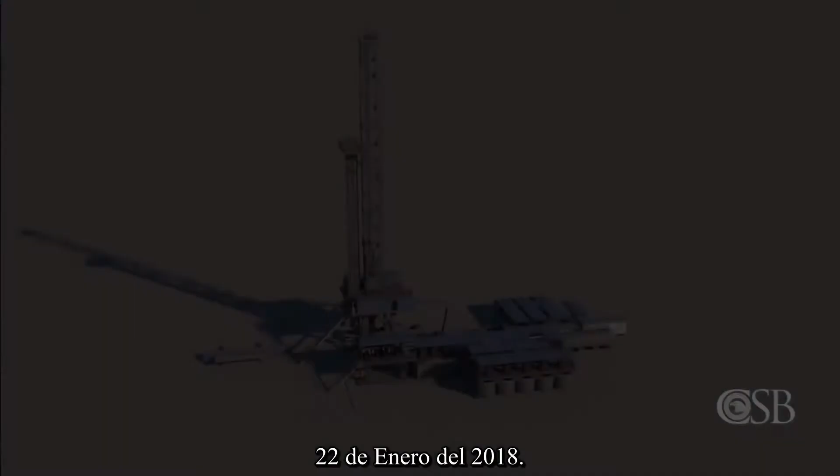January 22, 2018, the Pryor Trust gas well in Pittsburg County, Oklahoma. The well was operated by Red Mountain Operating, LLC, which contracted the Patterson-UTI Drilling Company to drill the well. In order to change a drill bit, crew members removed the drill pipe from the well. Approximately 3.5 hours later, a blowout and rig fire occurred, killing 5 workers.

Industry best practices recommend having 2 protective barriers in place at all times during drilling operations. But our investigation into the incident at the Pryor Trust well found that both of those barriers failed. The safety management system utilized at the well was simply not effective, and the result was a catastrophic blowout and fire.

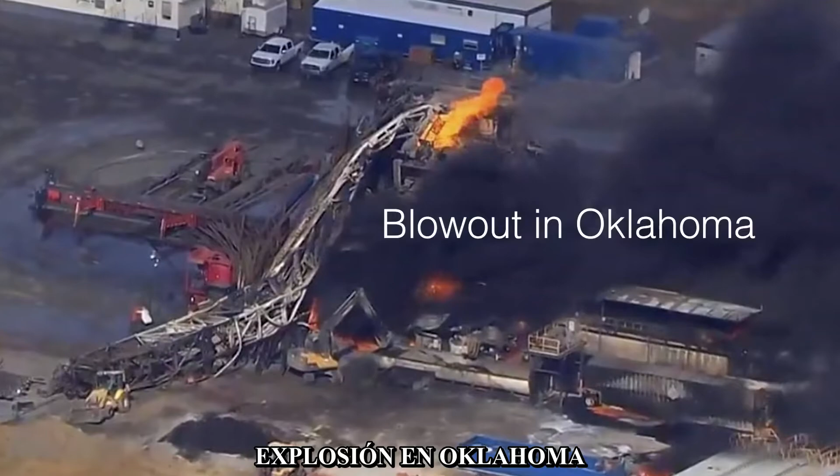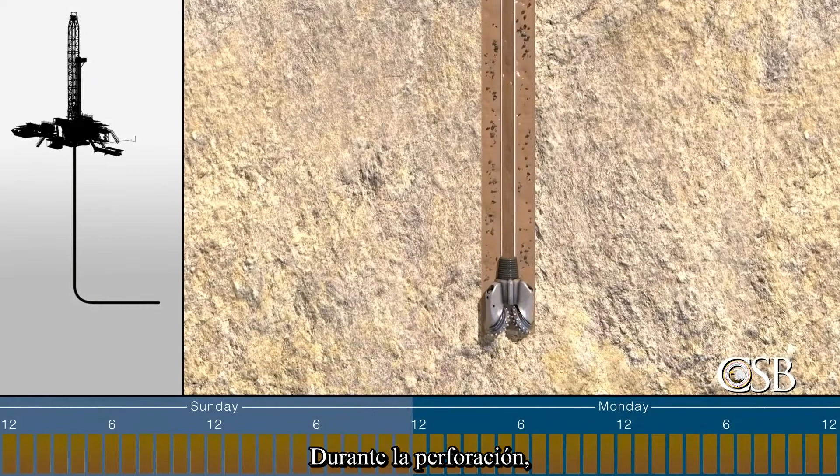The Pryor Trust gas well was comprised of vertical and horizontal sections being drilled to reach underground natural gas in the Woodford geological formation. During drilling, a diesel oil-based liquid called mud is pumped down through the drill pipe and back up through the area of the well outside of the drill pipe, called the annulus.

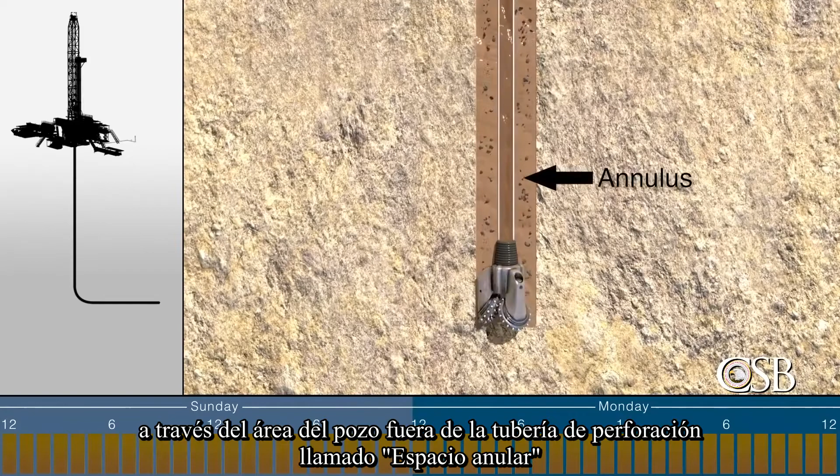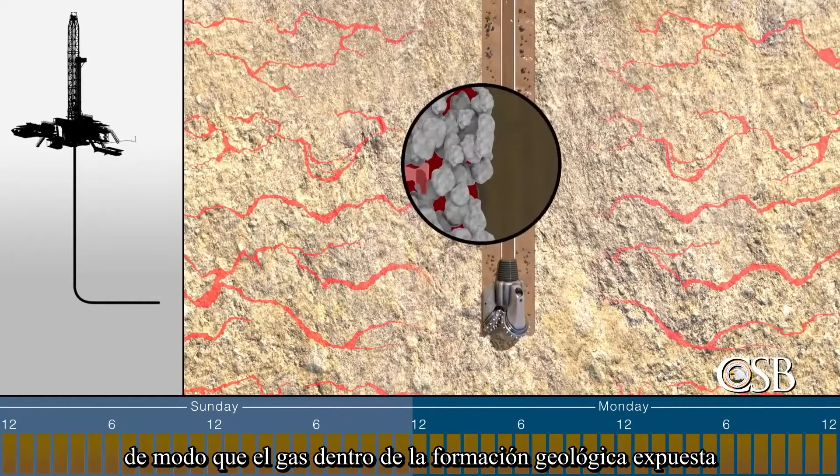When mud returns to the surface, it includes rock cuttings from the bottom of the well. Mud, however, has another important function. It is designed to add pressure to the well so that gas within the exposed geological formation is unable to enter the well during drilling. If that happens, and the gas is not detected, it can lead to a dangerous blowout.

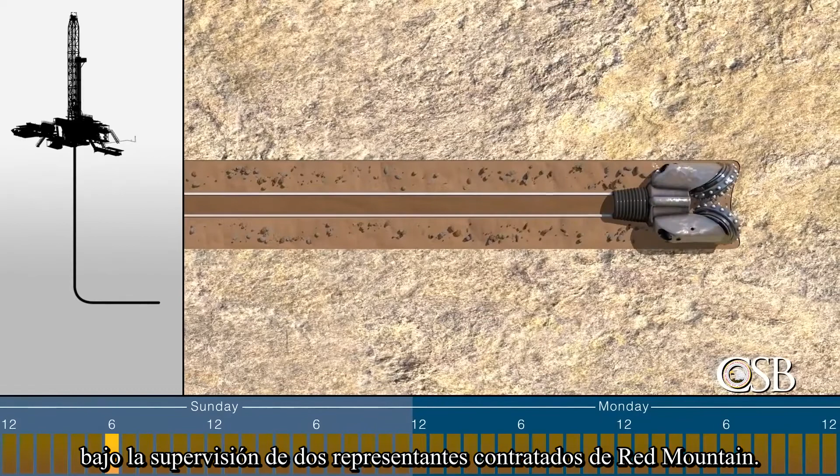On January 21, 2018, Patterson crew members had been drilling the well for 10 days under the supervision of 2 contracted representatives from Red Mountain. They were drilling the horizontal section of the well.

That morning, a crew member called a mud logger studied the rocks returning to the surface and found they were different than expected. He believed the drill pipe had inadvertently entered a different geological formation where Red Mountain did not intend to drill. Shortly after, gas started to escape from mud returning to the surface.

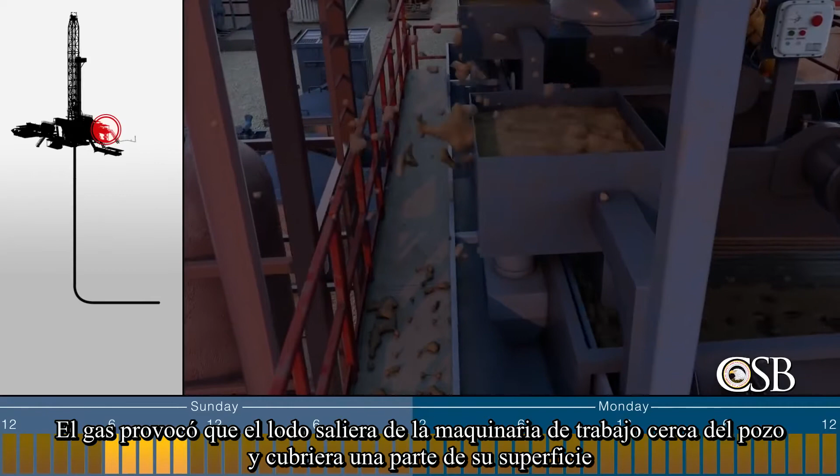The gas caused mud to spit out of equipment near the well and cover a portion of the rig. Around 11 a.m., the drilling crew adjusted piping so that mud returning from the well was routed to a piece of equipment called a mud gas separator that removed the gas from the mud. The separated gas was then routed to a flare to safely burn it.

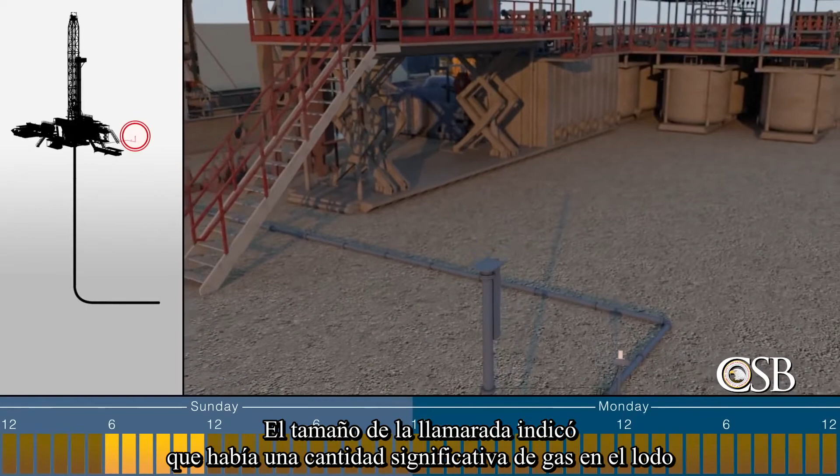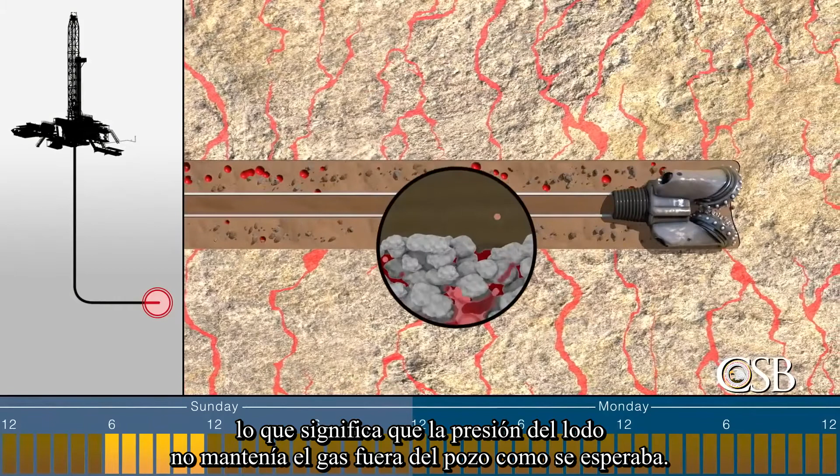The size of the flare indicated that there was a significant amount of gas in the mud and that the well had likely become underbalanced, meaning that pressure from the mud was not keeping gas out of the well as intended. The crew continued drilling underbalanced until 3:30 p.m., when they stopped because the drill bit had become worn and needed to be replaced.

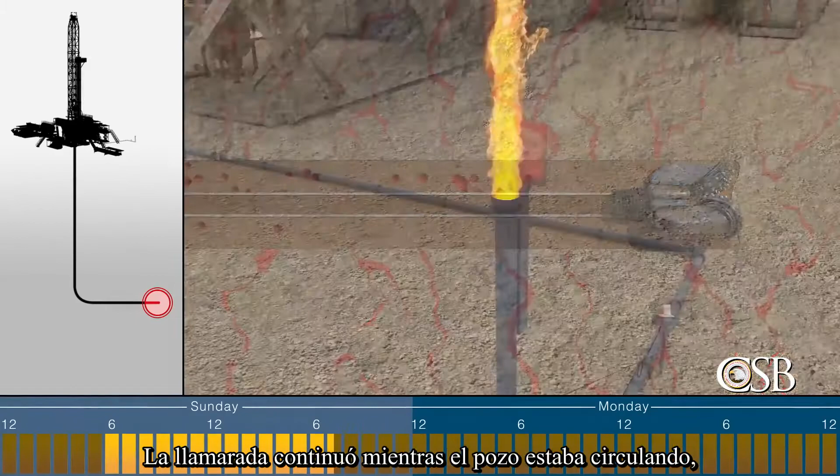The crew first circulated the well for 3 hours by pumping mud down the drill pipe and up the annulus. The flare continued while the well was circulating, an indication that the well remained underbalanced.

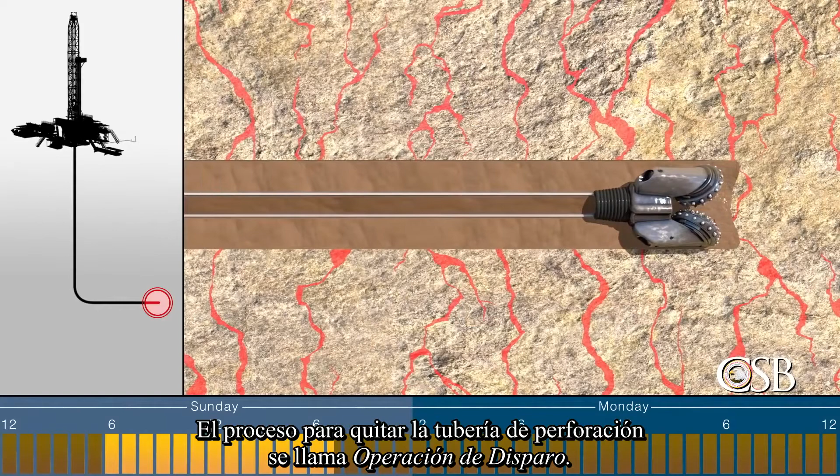While circulating, the Red Mountain representatives discussed how to remove the drill pipe from the well in order to replace the drill bit. The process to remove a drill pipe is called tripping. During any tripping operation, mud is pumped into the well to replace the volume of drill pipe being removed, which prevents gas from flowing into the well.

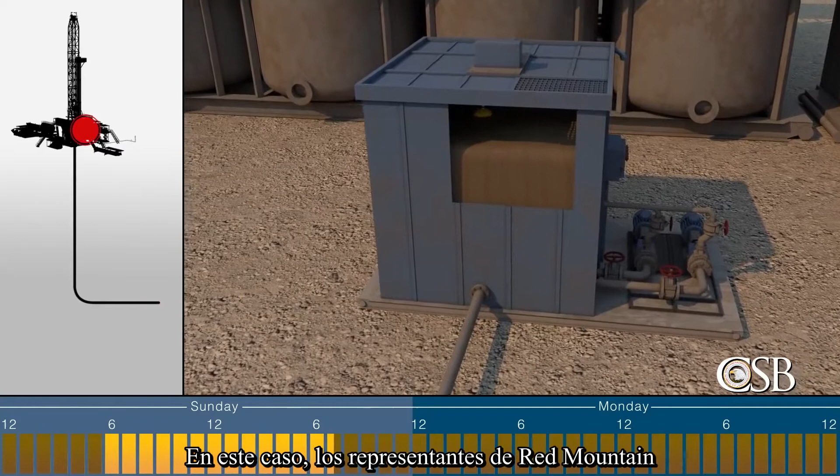In this case, the Red Mountain representatives decided to use a tripping method called calculated fill, which involved periodically pumping a calculated amount of mud into the well as the drill pipe was removed. They believed this method would keep the well contained if gas entered during the operation. But it was not a standard tripping method during normal drilling, so no one on the Patterson crew had performed it before, and they had no written procedure.

The crew started removing the drill pipe at 6:47 p.m. The CSB found that while tripping the drill pipe from the horizontal section of the well, not enough mud was pumped and gas entered the well.

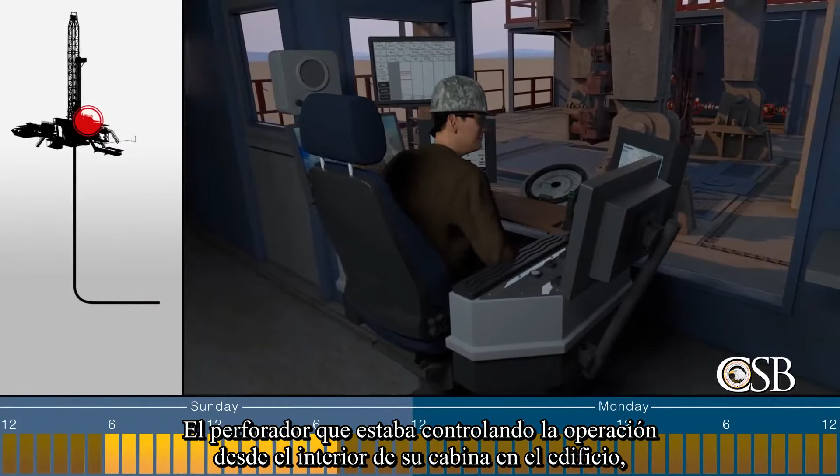The driller, who was controlling the operation from inside a building on the rig called the driller's cabin, did not see the discrepancy. That is because he had not been sufficiently trained on a new electronic version of a trip sheet, which is a form used to monitor and calculate whether a well is taking the proper amount of mud during tripping.

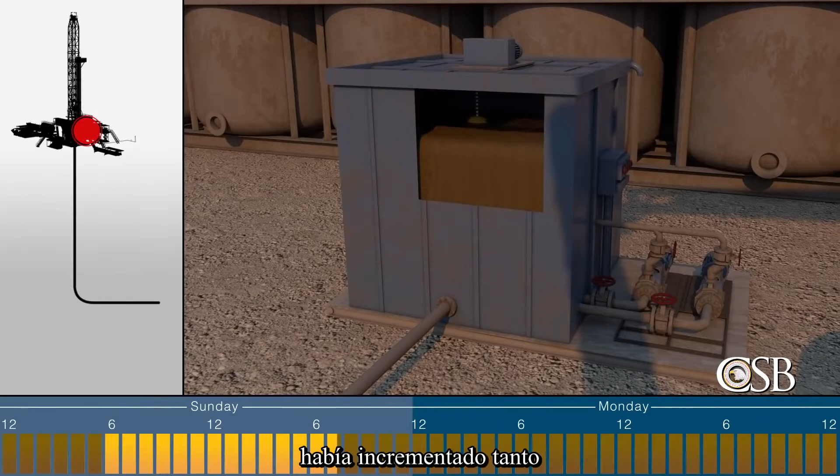As a result, he was unable to see that a significant amount of gas continued to enter or expand within the well, causing pressure in the well to increase and mud to backflow into a tank at the surface called the trip tank. In fact, pressure at the surface had increased so much that the centrifugal pump the crew was using was no longer able to pump mud against the pressure of the well.

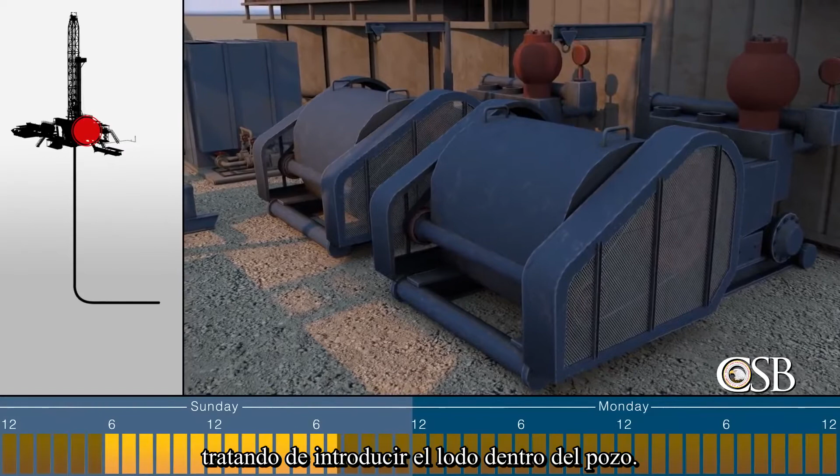Red Mountain's representatives decided to switch to higher pressure pumps, called mud pumps, to try to force mud into the well. They believed that the pressure applied by the new pumps would push any gas out of the well.

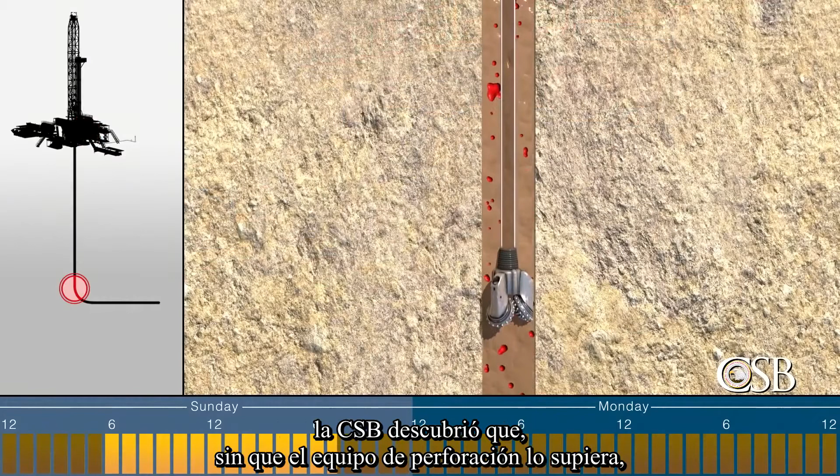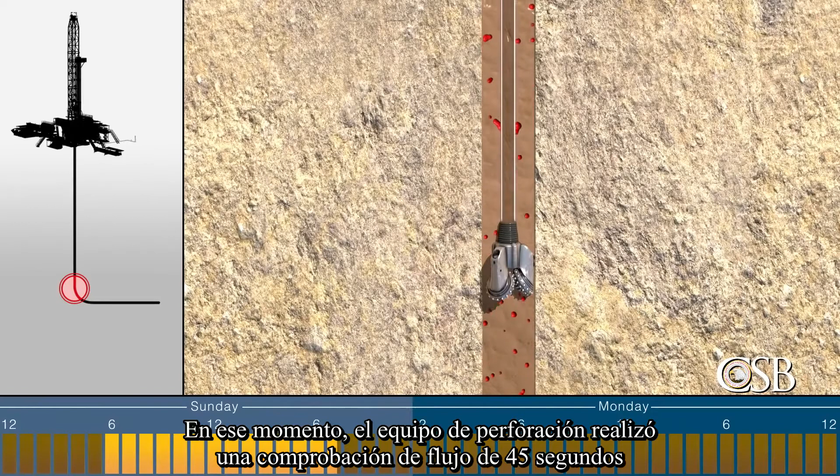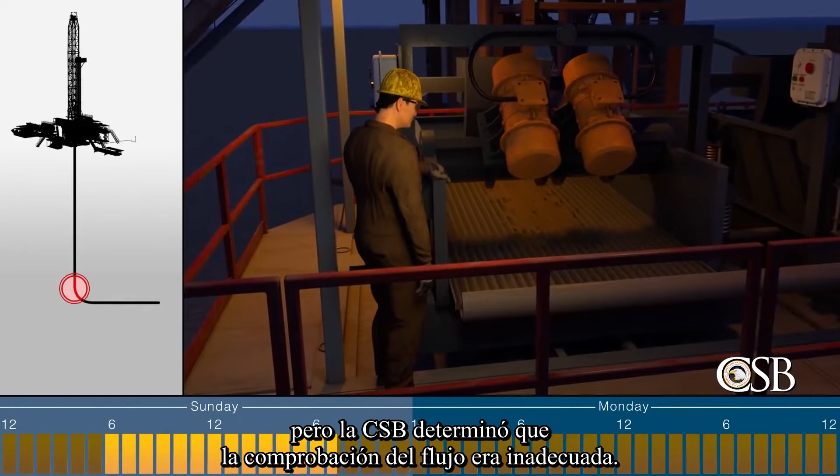But by the time the drill bit reached the top of the curve in the well, the CSB found that, unknown to drilling crew members, 20 barrels of gas had entered or expanded within the well. At that time, the drilling crew performed a 45-second flow check to see if gas was flowing in the well. The crew did not observe any flow of gas and believed the well to be stable, but the CSB determined that the flow check was inadequate.

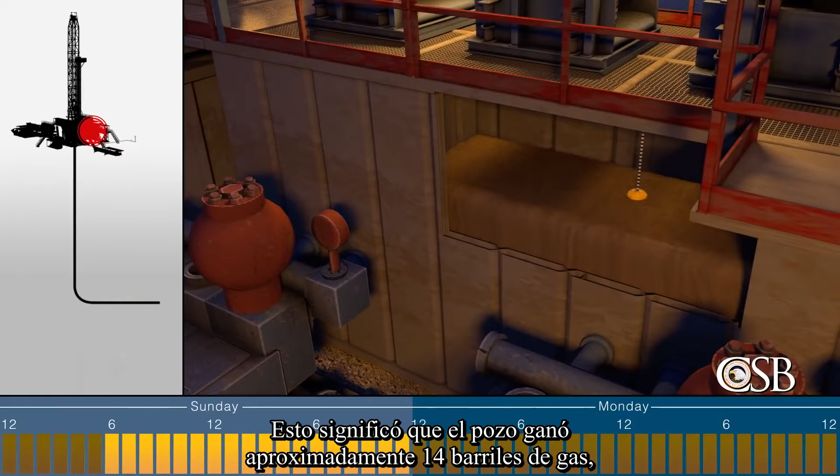At 11 p.m., the drilling crew again circulated the well. While circulating, the rig's mud pits, which are tanks used to hold mud at the surface and are equipped with level sensors, gained 14 barrels of mud when they should have remained stable. This meant that the well gained approximately 14 barrels of gas, which caused the mud to escape at the surface.

But the night shift driller had turned off the alarm system before the tripping operation, and no alarm sounded, so the large gain went unnoticed.

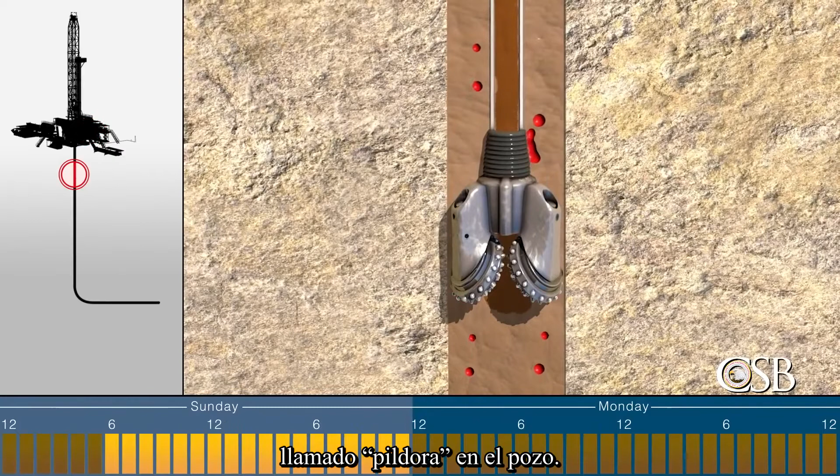Red Mountain's representatives then decided to pump a weighted volume of mud, called a pill, into the well, meant to generate enough pressure to prevent gas from entering the well.

But a Patterson drilling crew member misheard Red Mountain's instructions over the radio, and they accidentally added lost circulation material to the pill. This material is designed to clog breaches in the well and is not intended to be in weighted pills. Although the mistake was discovered, the pill containing the lost circulation material was pumped down to the bottom of the drill pipe, clogging it.

By 1:12 a.m. on January 22nd, the crew started to remove the drill pipe from the vertical section of the well, this time using the typical industry tripping method called continuous fill, where mud is pumped continuously into the well as the drill pipe is removed.

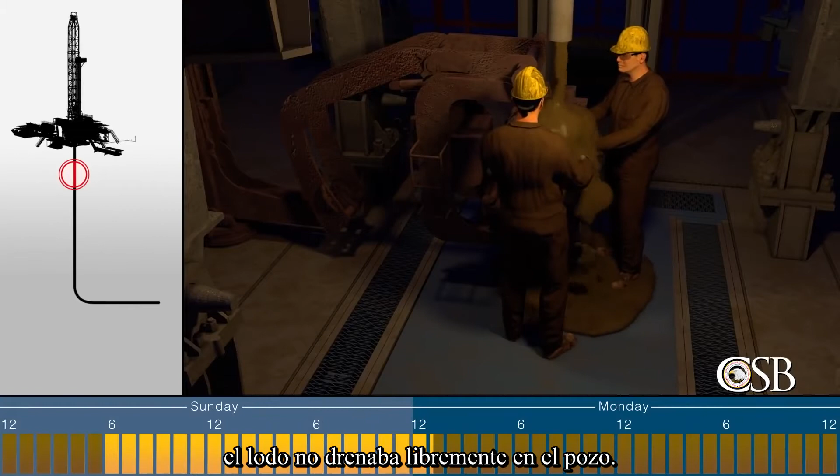But because the drill pipe was clogged, the mud was not freely draining into the well. The crew attempted to pump a weighted slug of mud into the drill pipe to push the clogged mud out, but this was not successful.

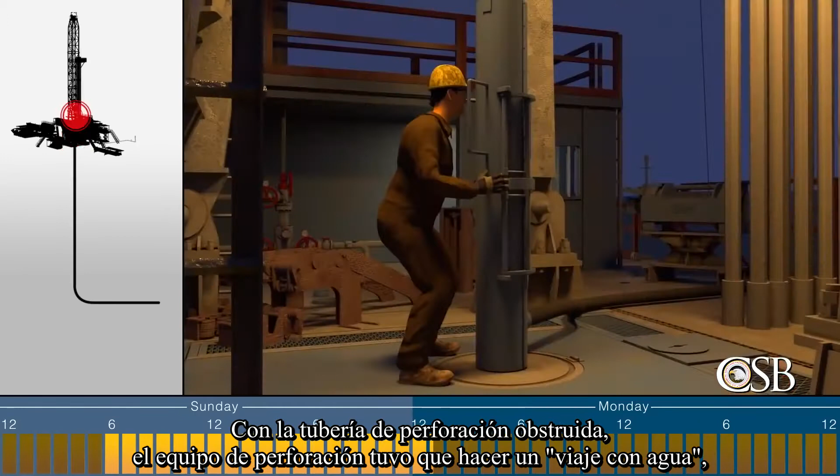With the drill pipe plugged, the drilling crew had to trip wet, meaning mud was in the pipe sections being removed at the surface. The drilling crew used what is known as a mud bucket to collect the mud from the drill pipe, which they drained into the trip tank.

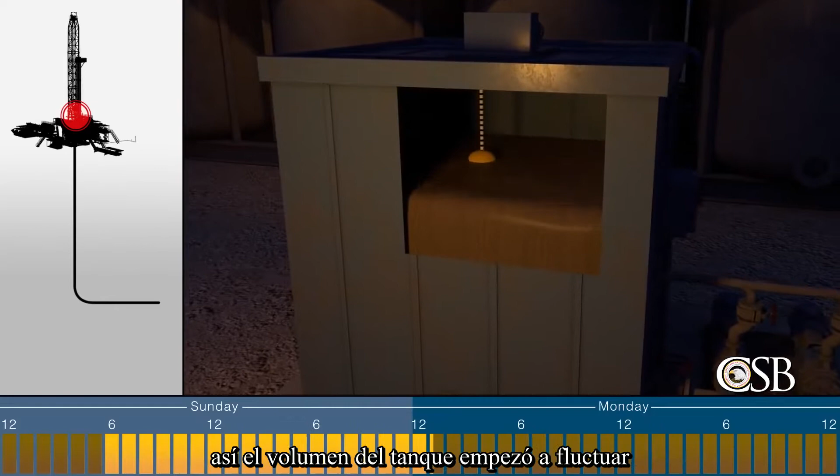But the trip tank was also used to pump mud into the well during tripping. So the trip tank volume started to fluctuate as mud was pumped out to the well and drained in from the drill pipe. The fluctuations confused crew members, and they did not realize that while the drill pipe was removed from the vertical section, the well gained another 23 barrels of gas.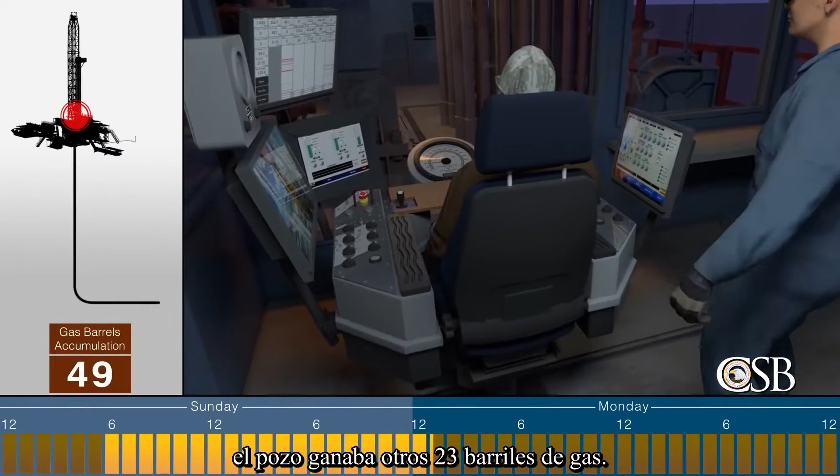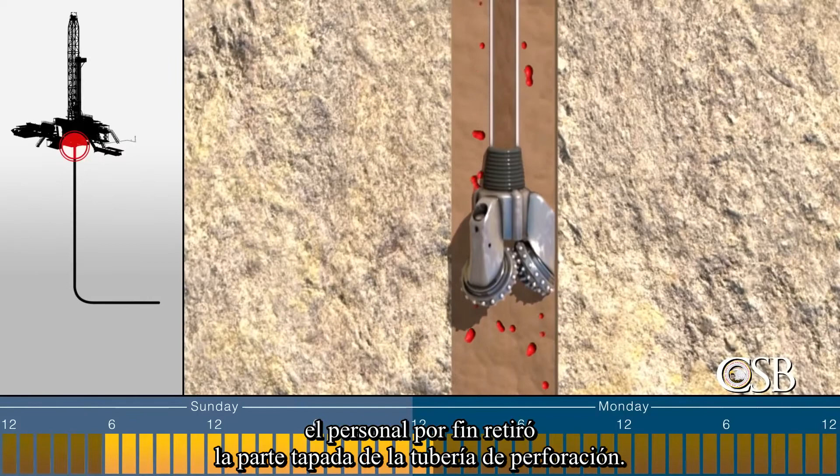When the bottom hole assembly, which is equipment at the end of the drill pipe that includes the drill bit, was near the top of the well, the crew finally removed the plugged part of the drill pipe. For the next hour, they tried to clear the clog.

But at that time, and during a subsequent shift change, the well was still flowing, gaining another 23 barrels of gas and pushing more mud into the trip tank. No one saw the gain.

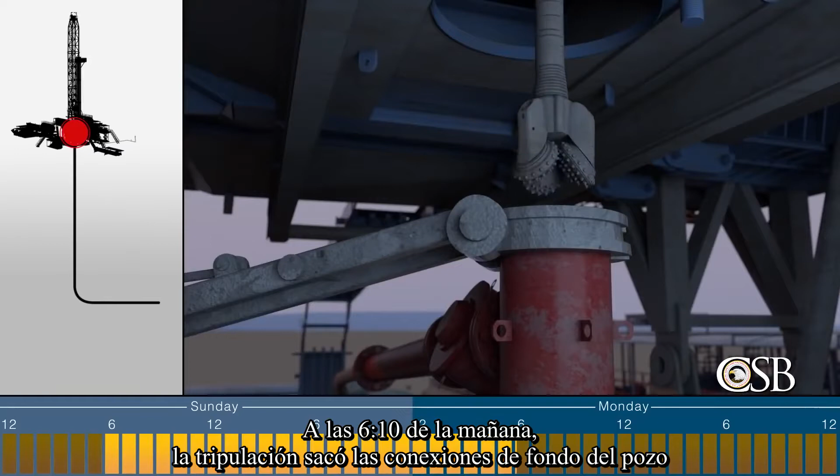At 6:10 a.m., the crew lifted the bottom hole assembly out of the well and closed the blind rams on the blowout preventer. They prepared a new bottom hole assembly for testing.

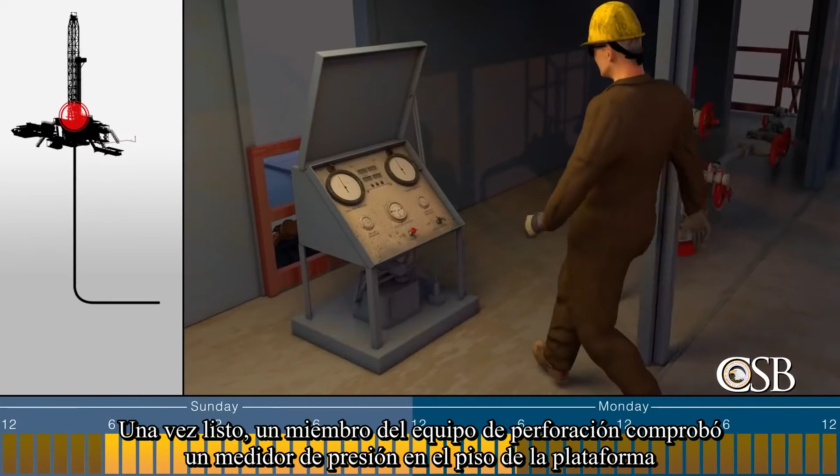When it was ready, a drilling crew member checked a pressure gauge on the rig floor to see if it showed pressure in the well, a safety precaution used before opening the blowout preventer. The pressure gauge showed no pressure.

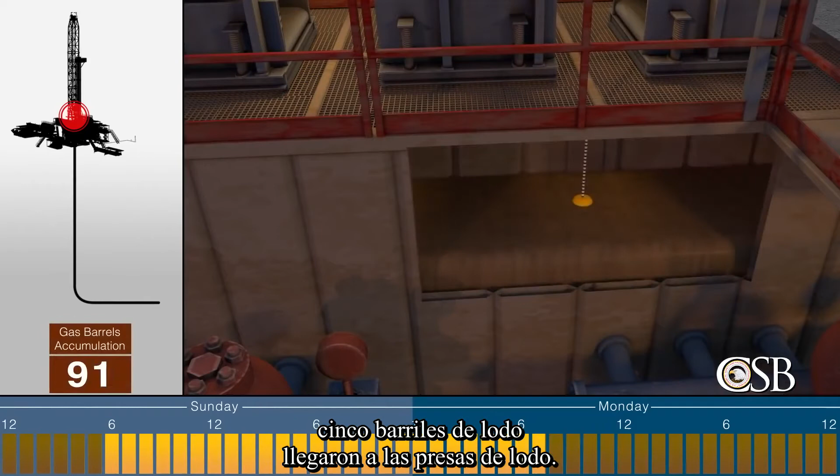But at 7:57 a.m., when the blind rams were reopened so the new bottom hole assembly could be lowered into the well, 5 barrels of mud surged to the mud pits.

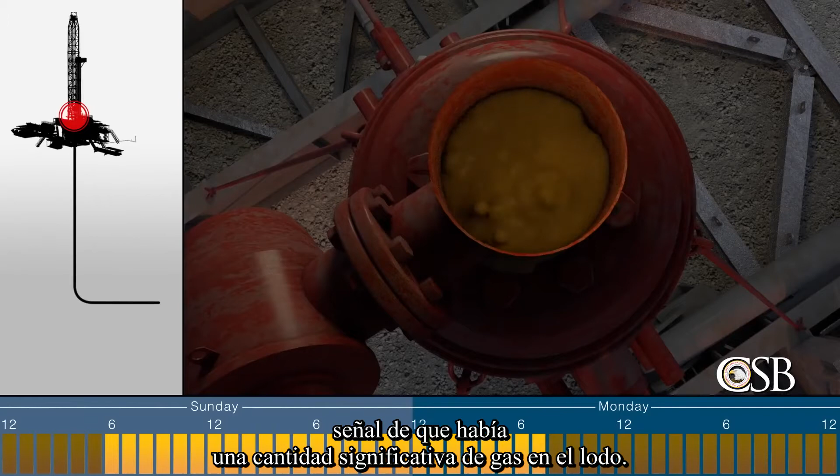At that time, a crew member pulled away the steel plate that had been covering the hole in the rig floor over the well. He waved over another worker who saw mud bubbling in the well, a sign that there was a significant amount of gas in the mud. That worker later told the CSB that he does not know if the mud bubbling was communicated to the driller.

Between 7:57 a.m. and 8:35 a.m., while the drilling crew was testing the new bottom hole assembly, the mud pits gained another 102 barrels of mud, a very large volume. This significant gain likely displayed on the driller's data screen, but the day shift driller also chose to turn off the alarm system, and it is unknown if the driller saw this dangerous gain.

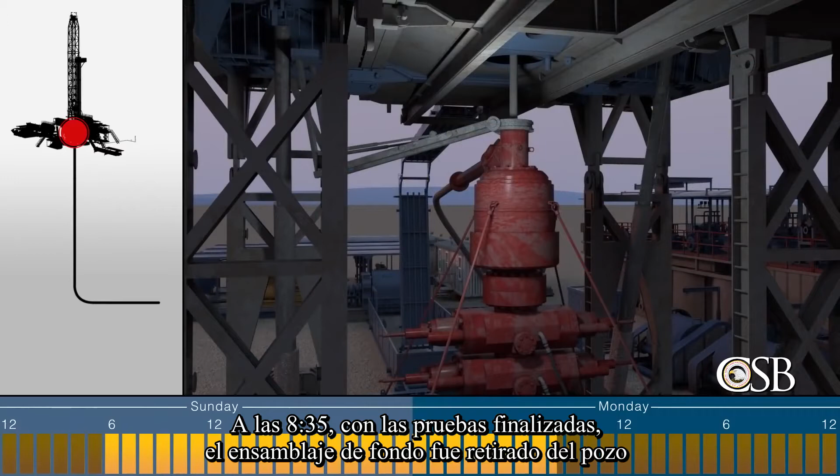At 8:35, with testing complete, the bottom hole assembly was removed from the well, and the mud pits gained another 12 barrels of mud, for a total influx of 207 barrels of gas into the well from the start of the tripping operation. A crew member saw mud flowing up out of the open blowout preventer stack.

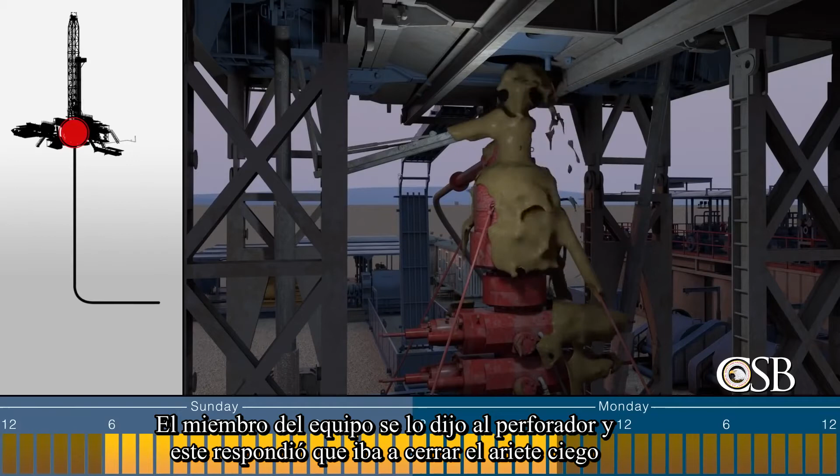The mud was shooting up steadily, getting closer to the rig floor. The crew member told the driller, and the driller responded that he was going to close the blind rams, but he never made it. Seconds later, mud blew upwards out of the well in what is known as a blowout.

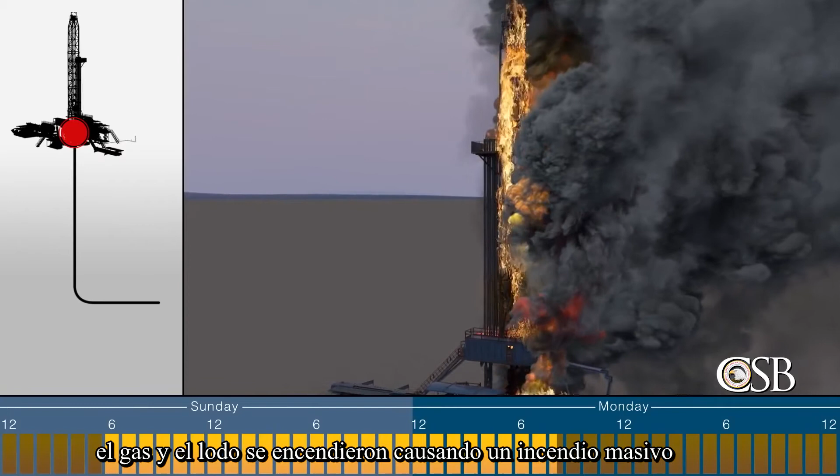Two workers on the rig floor ran into the driller's cabin, where three other workers were already located. The gas and mud then ignited, causing a massive fire. All five people in the driller's cabin were killed.

The blowout continued for hours until a well control services company was able to shut in the well around 4 p.m.

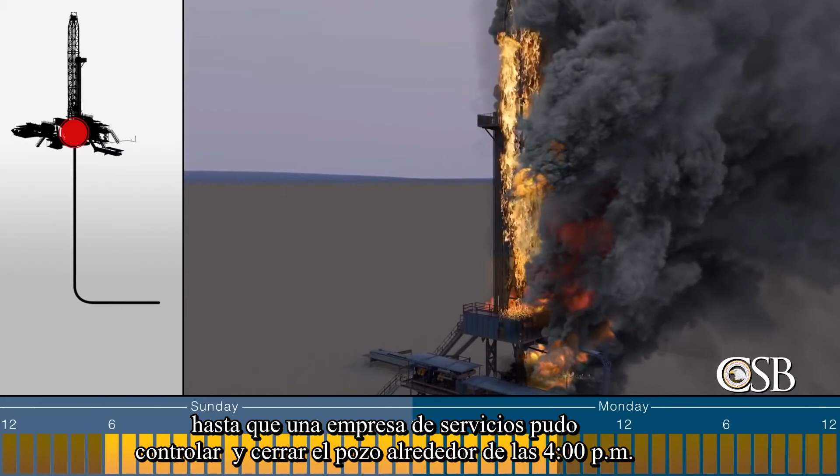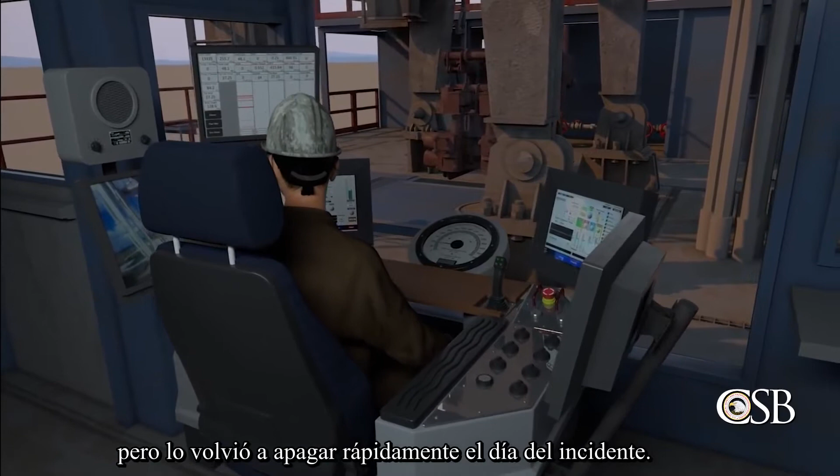During its investigation, the CSB found data indicating that on the evening prior to the blowout, the night shift driller turned off the entire alarm system. Data also indicates that the day shift driller briefly turned on the alarm system, but then quickly turned it off again on the day of the incident. Other than that short period, the alarm system was off for 14 hours, leading to the blowout.

We were not able to conclusively determine why the drillers turned the alarm system off. A possible reason is that the alarms were perceived as a nuisance or an annoyance. In fact, we found that had the alarm system been on, most of the alarms that would have activated during the 14 hours leading up to the incident likely would have been irrelevant to detecting the problems in the well.

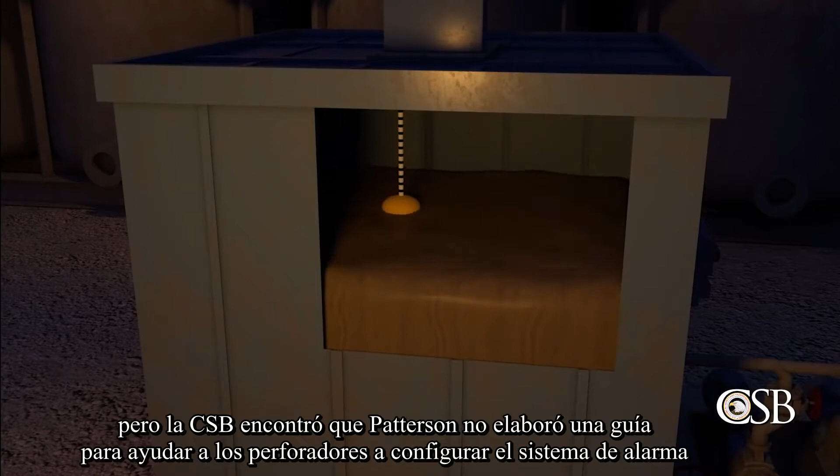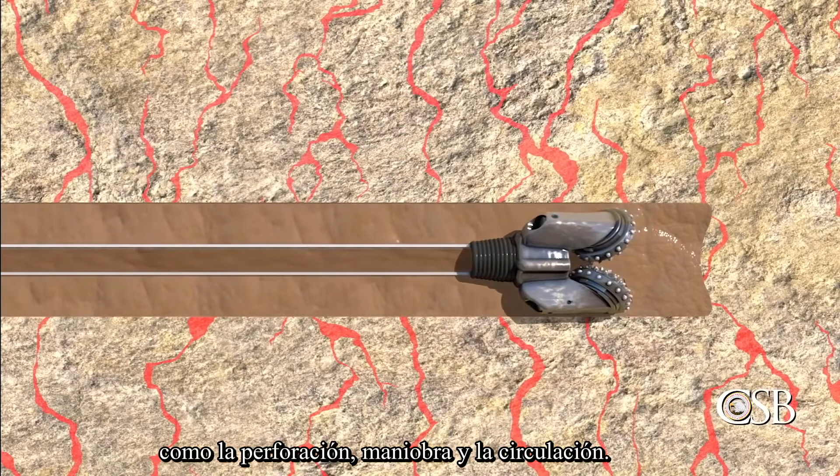For an alarm system to be effective, it must be configured so that the driller only receives alerts to conditions that require attention. But the CSB found that Patterson did not develop guidance to help drillers set the alarm system for the various operations performed on the rig, such as drilling, tripping, and circulating. Instead, to manage the alarm rate, both drillers apparently elected to simply turn off the alarm system.

We concluded that what's called a state-based alarm strategy is one way to solve this issue. For example, on a drilling rig, there could be different active alarms for each operation, such as drilling, tripping, and circulating, so that alarms critical to a certain operation do not become a nuisance when operating in a different state where those alarms are not needed.

Although there is a large body of guidance and recommendations on the design of alarm systems for hazardous operations, none are specifically targeted for the drilling industry. As a result, the CSB made a recommendation to the American Petroleum Institute to develop a standard on alarm management, specifically for the drilling industry, that addresses drilling's unique dynamic environment and provides guidance on implementing a state-based alarm system for different operating modes.

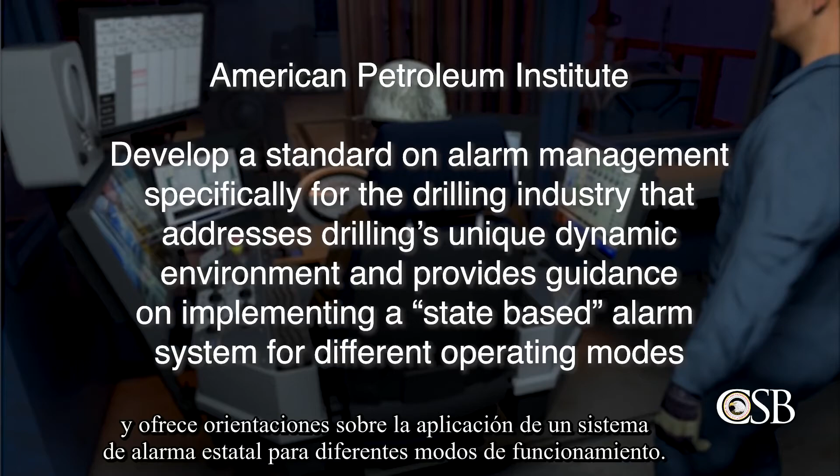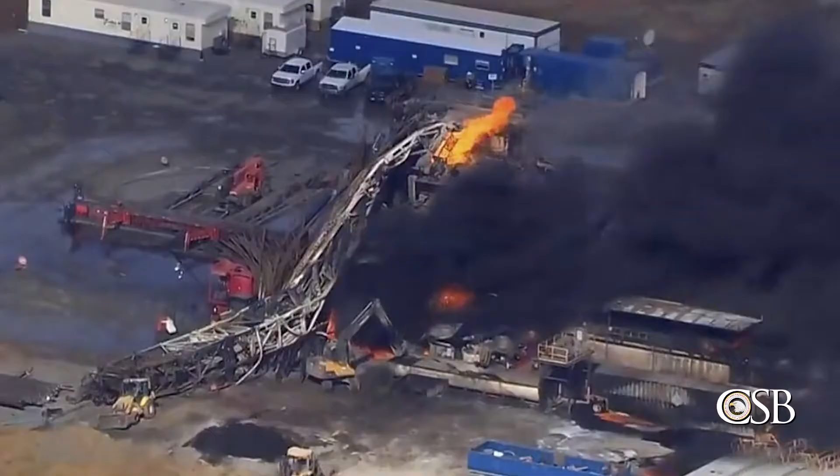When the blowout started, two crew members on the rig floor ran inside the driller's cabin. Three other crew members were already in the driller's cabin, and all five workers were killed. It is unknown how long the victims remained alive inside the driller's cabin, but they had no viable escape routes.

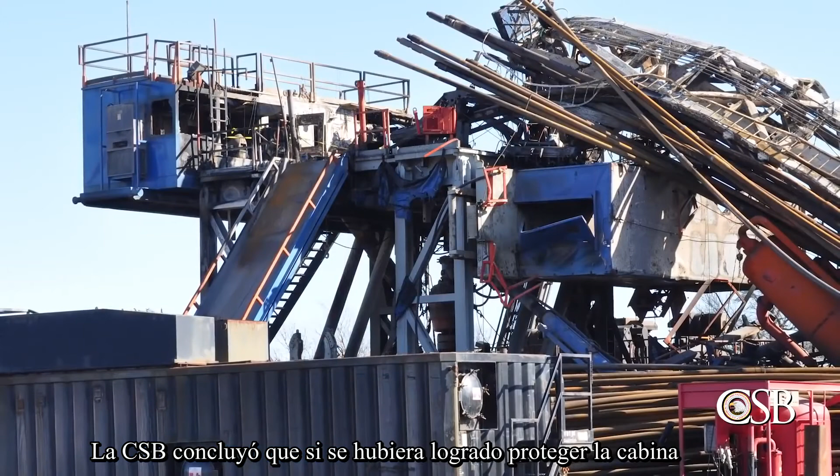There were two exit doors from the driller's cabin, but both of those exit doors were blocked by flames after the gas and mud ignited. The CSB concluded that had the fire rating of the driller's cabin been ensured for a minimum time, with emergency escape options from the floor or from the back wall, there could have been a better chance for the workers inside to have survived this incident.

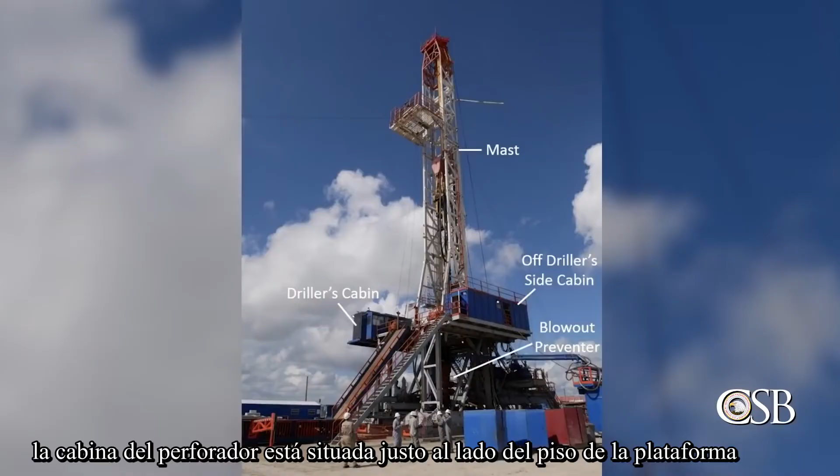Stan Christman is a drilling expert who consulted with the CSB on the Pryor Trust investigation. On a drilling rig, the operations are controlled from the driller's cabin by the key man, the driller, and he has a crew that works for him on the rig floor. The driller's cabin is located right next to the rig floor. He can see, talk over radio, even directly to the crew and get things done.

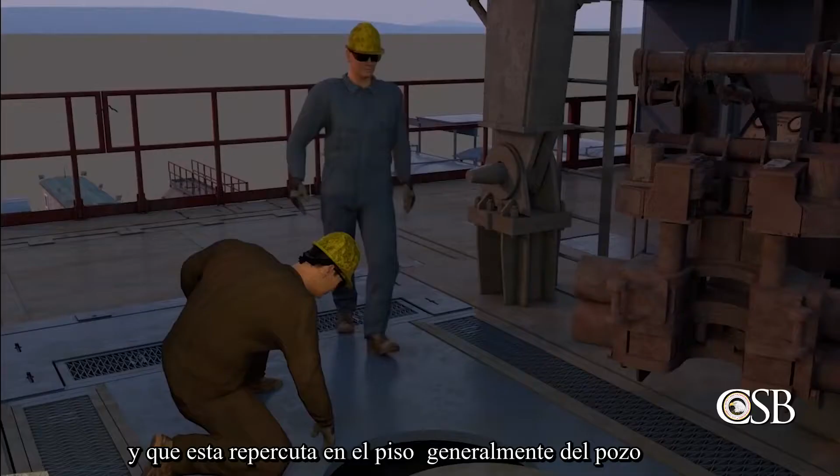Having the driller's cabin near the rig floor puts it closer to the hazards, and that is things happening on the floor, typically from the well. These hazards are things we could probably think further about. How do we improve the reliability and safety of these cabins for these unusual events?

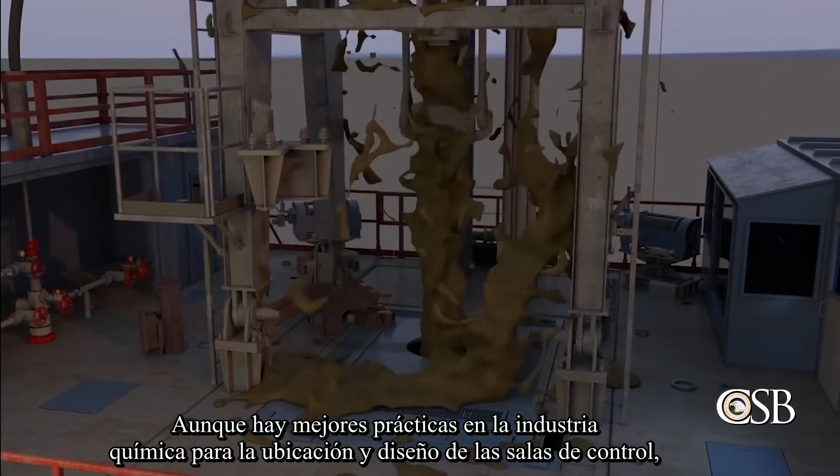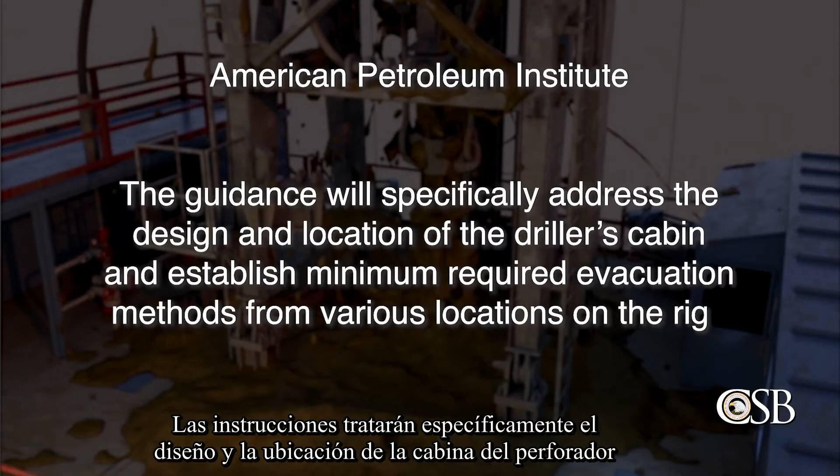Although there are best practices within the chemical industry for the location and design of control rooms, there is no guidance specific to drilling. As a result, the CSB made a recommendation to the American Petroleum Institute to develop guidance addressing the protection of onshore rig workers from fire and explosion hazards in the event of a blowout. The guidance will specifically address the design and location of the driller's cabin and establish minimum required evacuation methods from various locations on the rig.

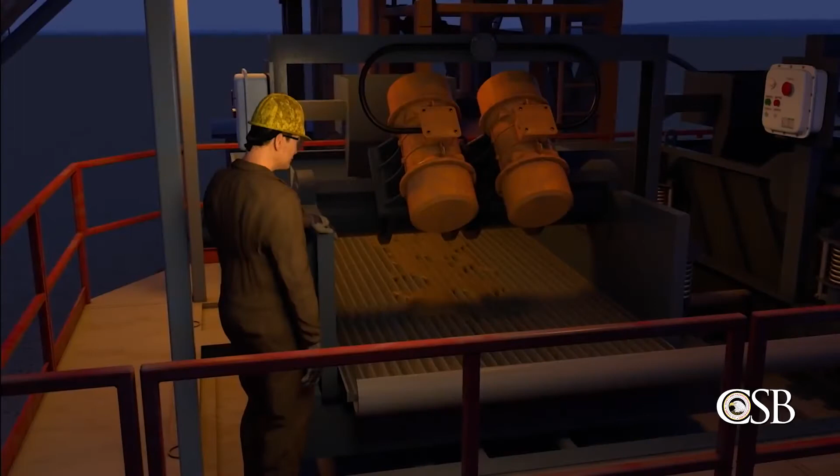Flow checks are a safety-critical operation used to determine if gas or other formation fluids have entered a well, which could lead to a blowout.

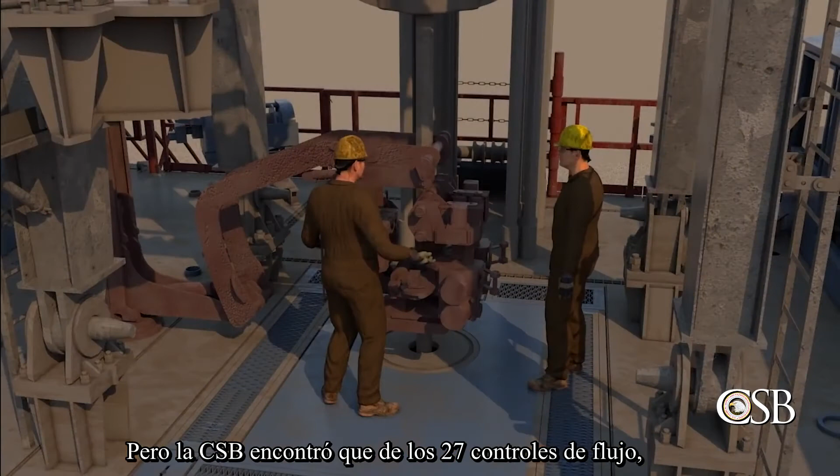Patterson policies required flow checks to be performed at various times during the tripping operation. But the CSB found that of the 27 flow checks required by Patterson during the drilling of this well and the previous well, only 2 were performed, and those were inadequate. There was a culture on this rig that accepted the non-performance of flow checks. Performing flow checks during the tripping operation, as required by Patterson, could have identified that the well was flowing and could have prevented the blowout.

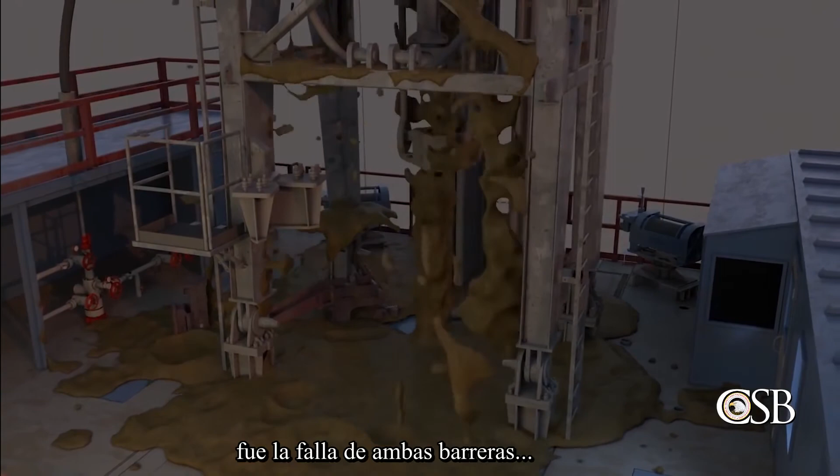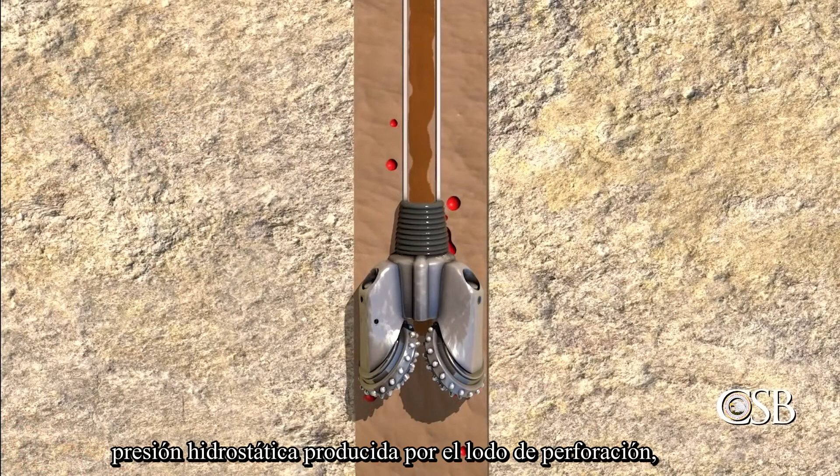The CSB found that the cause of the blowout and rig fire was the failure of both barriers that should have been in place during the operations leading to the blowout. Those two barriers were the primary prevention barrier, hydrostatic pressure produced by drilling mud, and the secondary mitigation barrier, human detection of gas entering the well and activation of the blowout preventer.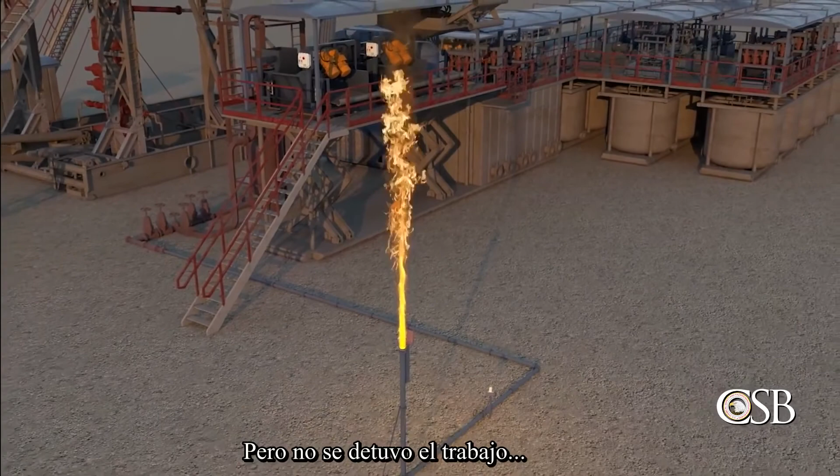When the well became underbalanced on January 21st, the primary protective barrier was lost, but work was not stopped so that the barrier could be reestablished by increasing the weight of mud, and no analysis on the loss of the barrier was performed. We learned that Red Mountain had developed what they called a drilling prognosis, which is a type of well plan.

But that plan did not specify what barriers were required or how to identify if a barrier was lost. We found that development of a more comprehensive plan, such as what's known as the Well Construction Interface document, which is used more widely in offshore drilling, was not required.

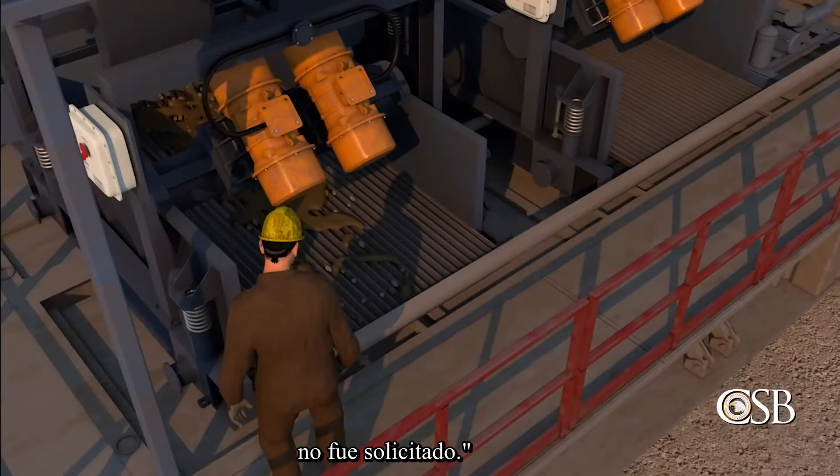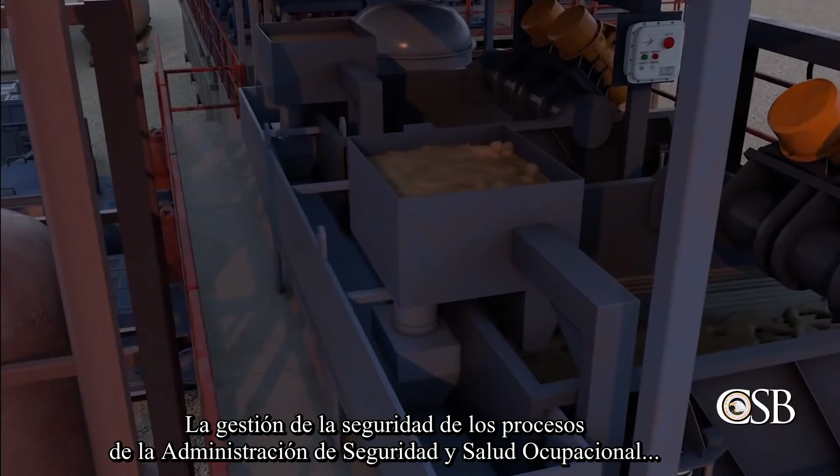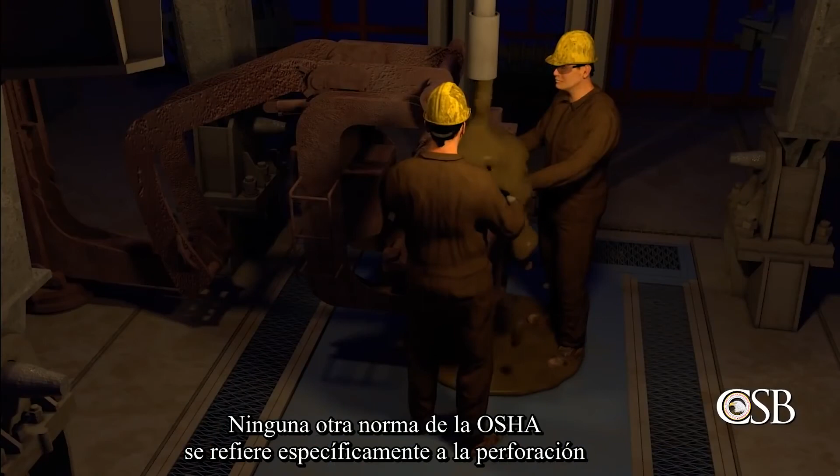In fact, there are minimal federal regulations governing the safety of onshore oil and gas drilling operations. The Occupational Safety and Health Administration's Process Safety Management, or PSM standard, which would require a hazard analysis of the operation, does not apply to drilling. No other OSHA standard specifically covers drilling, and no other federal regulatory body oversees the safety of onshore drilling operations.

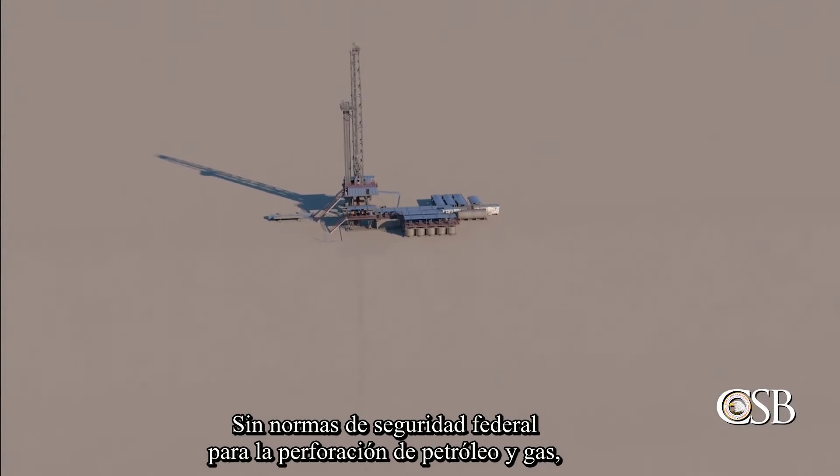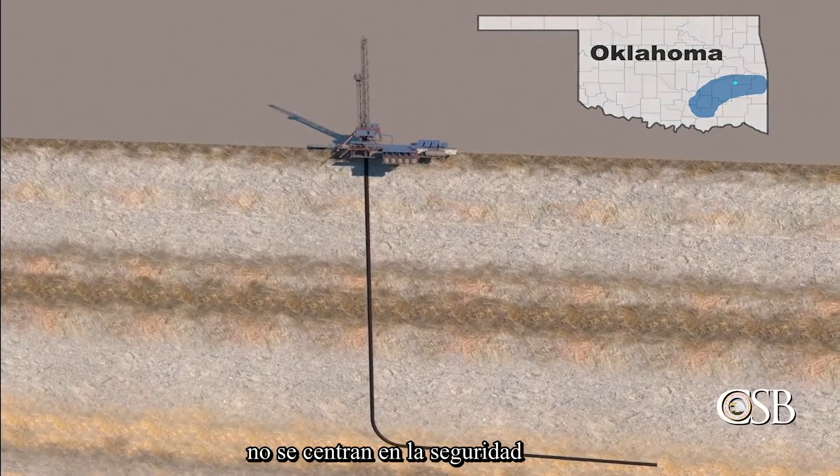With no federal safety standards for oil and gas, drilling companies are governed by a patchwork of individual state laws. During its investigation, the CSB determined that the laws in Oklahoma, where the incident occurred, are not focused on safety, and instead stressed maximizing production and eliminating the loss of hydrocarbons.

The CSB believes more focused and specialized regulatory coverage, like the OSHA PSM standard for the chemical industry, is needed to better control the hazards inherent to drilling. With the requirement for a more effective safety management system, drilling companies can avoid incidents in a proactive manner, protecting both their workers and the environment.

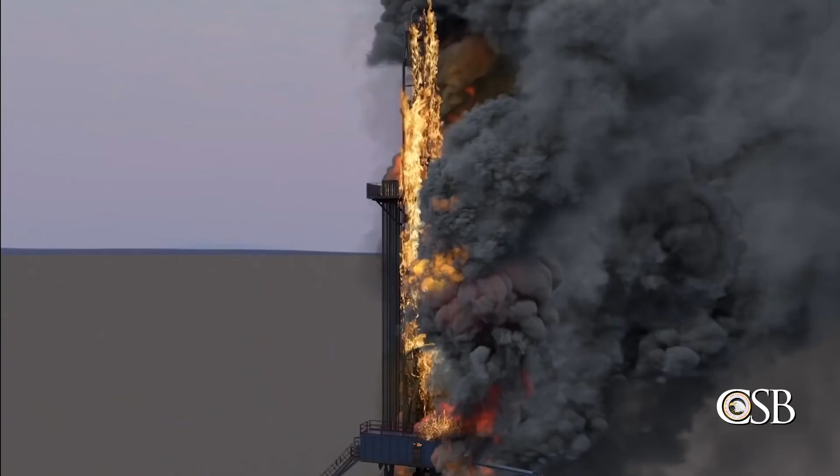As a result, the CSB made recommendations to OSHA to either apply the PSM standard to drilling of oil and gas wells or develop a new standard with a safety management system framework similar to PSM that applies only to the drilling of onshore oil and gas wells.

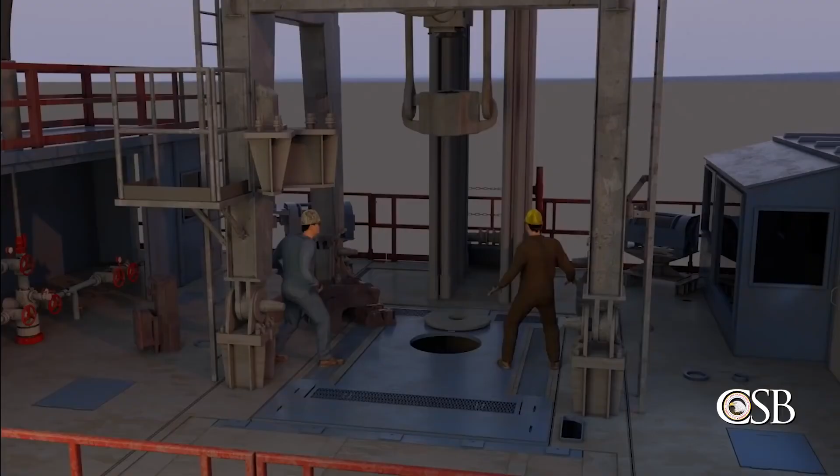To prevent similar blowouts, drilling contractors and operators should develop a well construction interface document, bridging the operators' and drilling contractors' safety systems and providing a barrier plan, including how to monitor barriers and how to respond if a barrier is compromised. Create procedures for operations, including tripping.

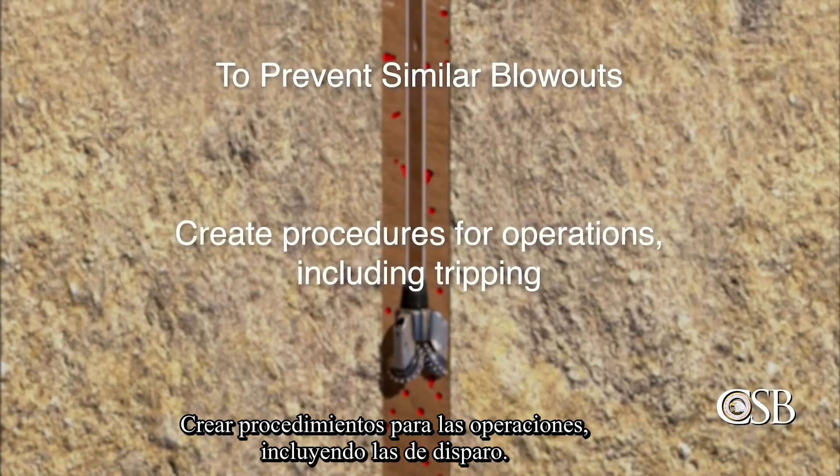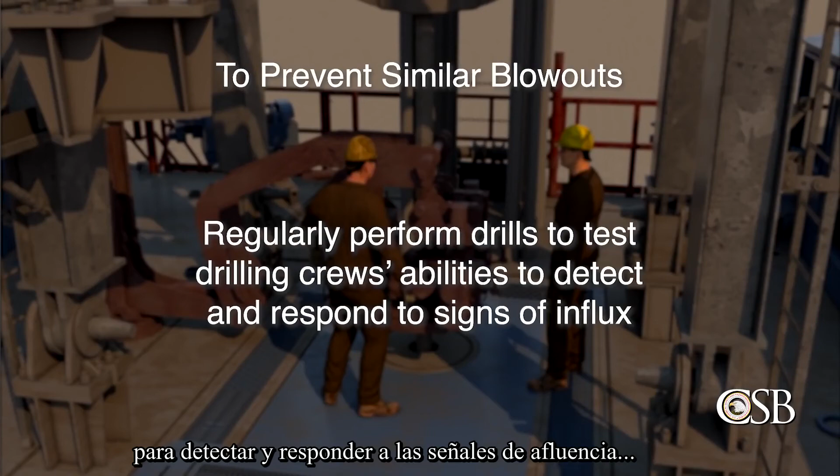Design alarm systems so that only the alarms indicating a condition needing drilling crew attention are active. Regularly perform drills to test drilling crews' abilities to detect and respond to signs of influx, and implement an indicators program to monitor and improve policy implementation rates.

The blowout and massive fire at the Pryor Trust well was completely preventable. We hope our findings and recommendations are used by the drilling industry to promote safer operations so that similar tragic incidents can be prevented. Thank you for watching this CSB safety video.